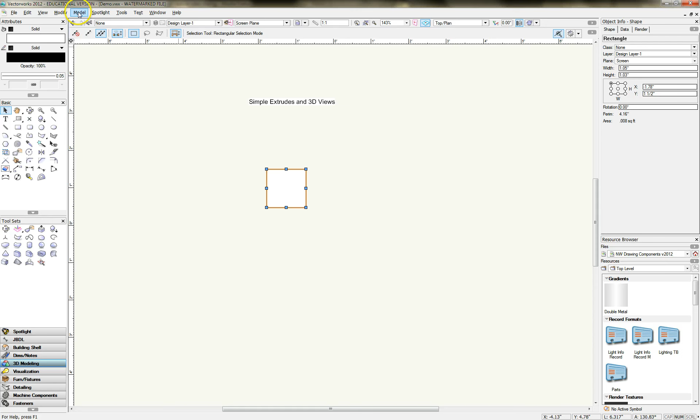Now what we can do is, when we do a basic extrude, you have to have the object selected. So I have this square selected, and then I'm going to come up to Model, and we're going to do the Extrude command. I've never played with any of these, but I'm going to make it 4 inches, so we're going to extrude it 4 inches up. Okay, and we're going to click OK.

Right now, nothing looked like it changed. Let's go back to right isometric view, and here's our big rectangular cube, sort of.

Now, just to make it look nicer, we're going to try a quick rendering method. We're going to try Fast RenderWorks, and here's the box rendered.

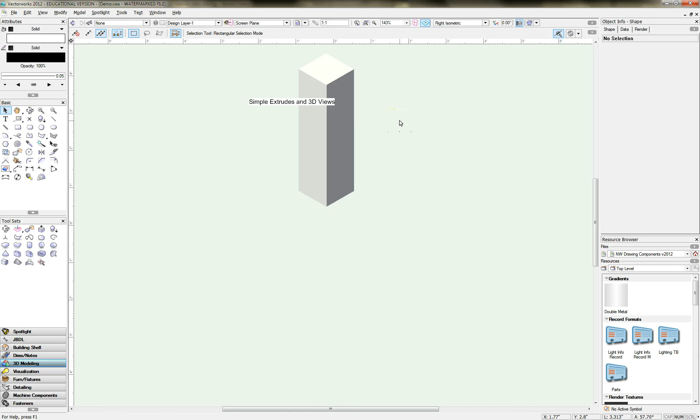I'm going to come back to wireframe. So this is in right isometric view. We'll come back to top view, front view, right side view - it all kind of looks the same. But that is, at the very basic level, how to do an extrude.

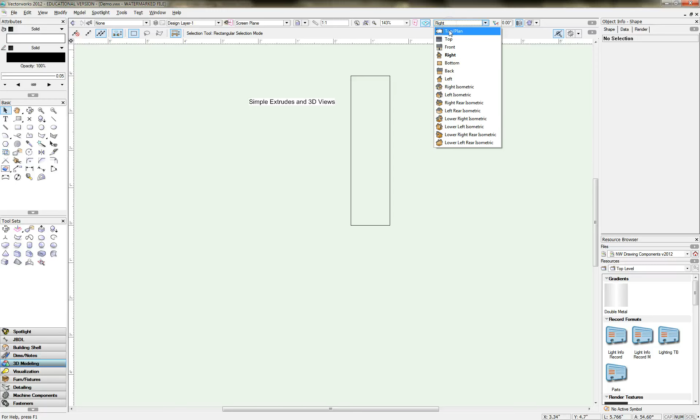Now I'm going to come back to the top view here, and now I'm going to do another extrude, and I'm going to extrude a circle. We'll put him right there, and I'm going to color him red.

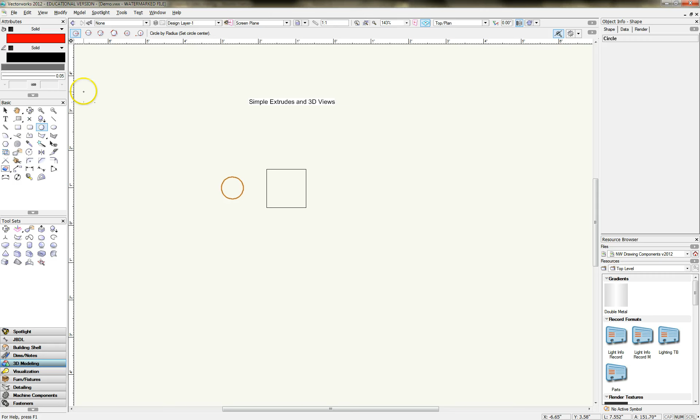Now we're going to extrude again - Model, Extrude. Let's do 4 inches again. Again, nothing looks like it happened, and we click on right isometric, and here's our extrude. Now if I render this, it's going to show - remember, we made that a red cylinder.

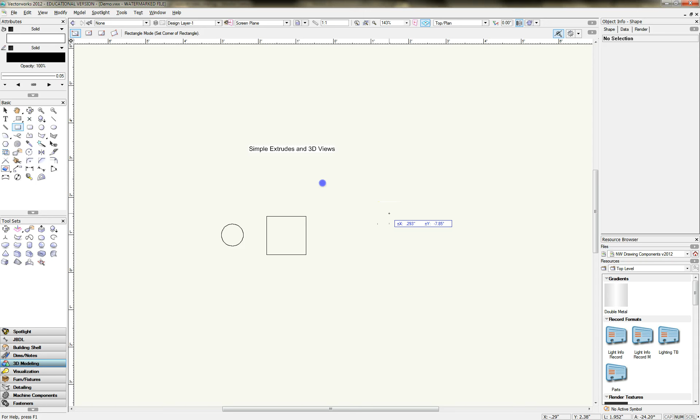Now what I'm going to do is, let's say we want to have a cube go across this guy here. So what we want to do is - well, you could do either one of two things. You could do this, and we want this cube to be like this, and now let's extrude it to 1 inch.

Now let's come and look at it in the front view. That is one way to do an extrude.

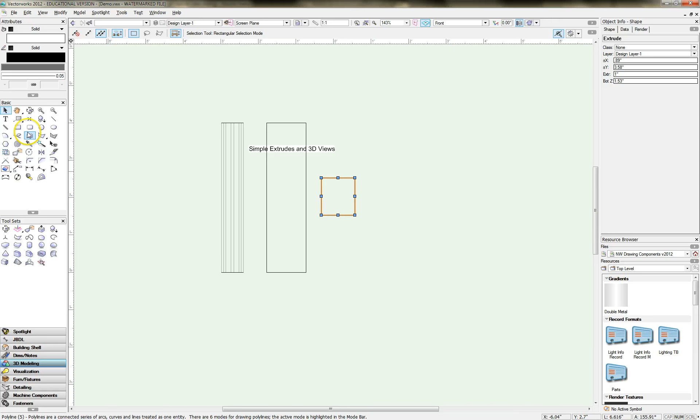Now let's do it the other direction. I'm going to draw a rectangle right here, and now we're going to extrude it away from us. So we're going to do extrude again, 5 inches. Now let's look at it from the top view, and there it is.

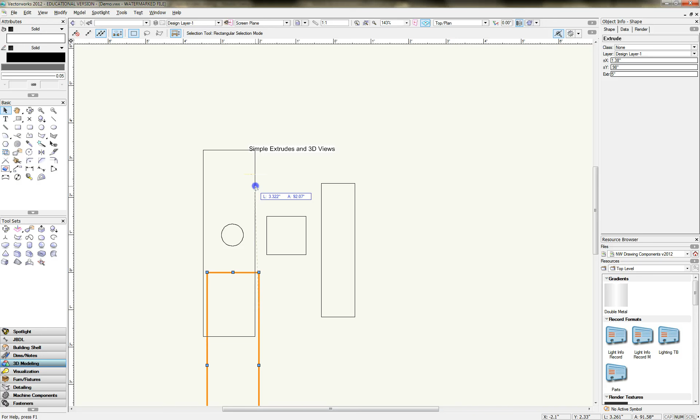Alright, so now let's look at it in right isometric, and here is our object. Let's look at it in rendered view again, and here are the blocks that we made.

So in this video, we talked about views just a little bit. I showed you how to do simple extrudes - either a cylinder, where we took a circle and turned it into a cylinder, or we took a square rectangle and turned it into a longer rectangular box.

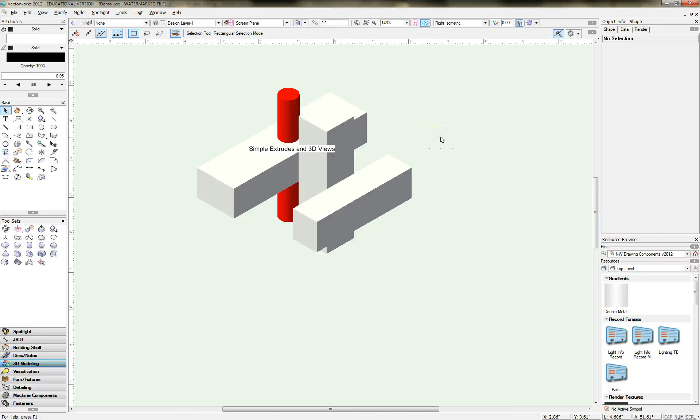In future videos, we are going to be looking at extruding more complex items and different methods of extruding objects. So thanks a lot and happy drafting.